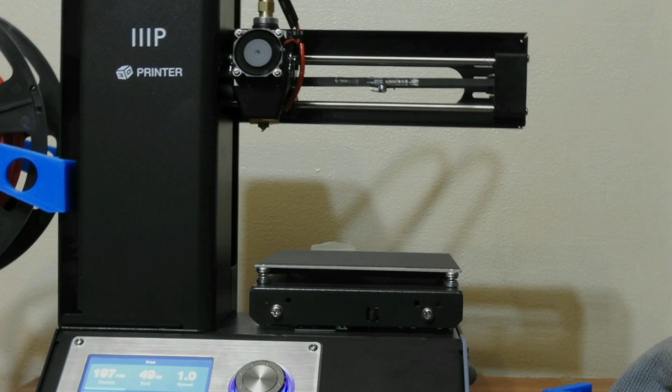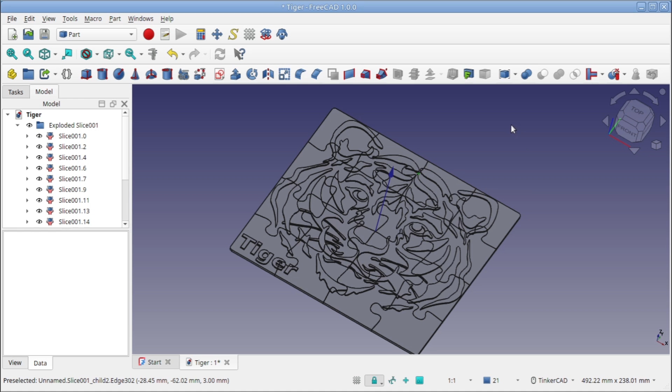So in this video I'm going to give you a tutorial on how you can make 3D puzzles, jigsaw puzzles, using FreeCAD with a little bit of help from Inkscape. What these are is, you can see here, I'll just make a few of these slices invisible. You can see that we actually have a three-dimensional puzzle.

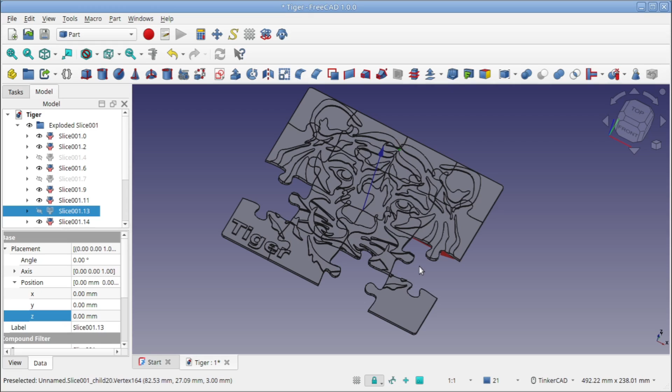This can be printed in place and then put together by your kids or your nieces, nephews, friends. It can be as complicated as you want to make it or as simple as you want to make it. And it's not too hard to do. So that's what we're going to do today. Let's get started. To start with, I'm going to look for a graphic to use on my puzzle.

And in our example, we had a nice tiger. So I'm here on Freepik, Freepik.com. And I'm going to search for tiger. Now what we're going to want to find is vectors. So you see this little highlight here in the middle of this button, vectors. We'll select that. And that will show us line art of tigers.

This is the one that I used. It's just about right. You want to find something that's not too complex. This would be probably a bit too much here. It would overload the CAD engine perhaps. So I'm going to go with this tiger. It's not too complex and I think it'll work just fine. So I selected this one and I downloaded it.

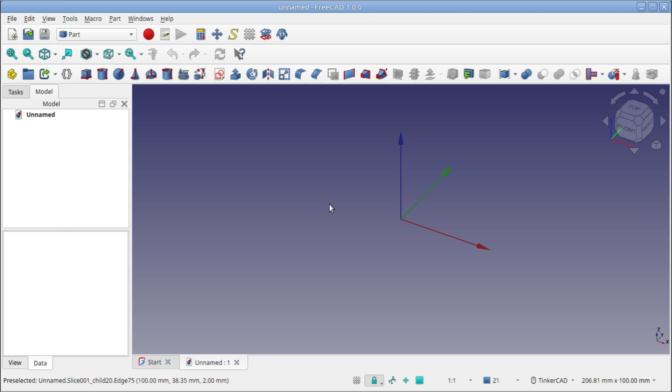Now that I've got my graphic downloaded, before we start working on it, we're going to go to FreeCAD and figure out how big we want our puzzle to be. Okay, I'm in FreeCAD version 1.0 and I'm going to make a new file. We're going to be working in the Part workbench. So I'll create an empty file. The first thing that I'm going to do is make a simple square base for our puzzle. So we're going to go to the sketch, create a sketch on the XY plane.

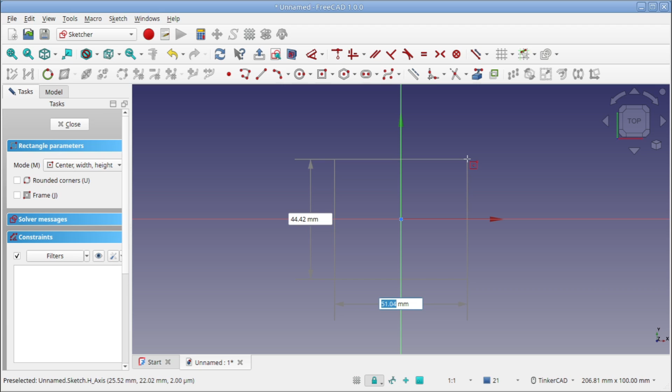And I'm going to just take the simple centered rectangle, draw this out. And I know my print bed can handle up to 250 millimeters, I think. But most print beds on a lot of printers are only 200. So we're going to go 200 millimeters for the size. So I'm going to put in 200, tab, 200, enter. So now we have this nice square platform.

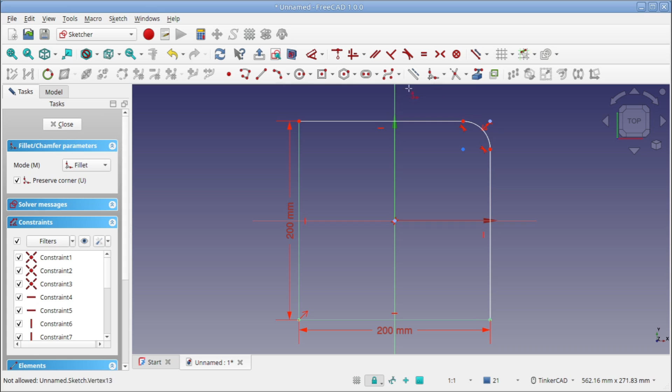Another thing I'm going to do is round these corners off a little bit before we get out of here. So I'll select the Create Fillet tool and I'll click on the point of each of these corners. And that's going to create these fillets and also preserve our dimensions. Then I'll right click to cancel the tool and I'm going to select each of these arcs. Just the line, you just want to make sure you're only selecting the line. And I'm going to make them equal.

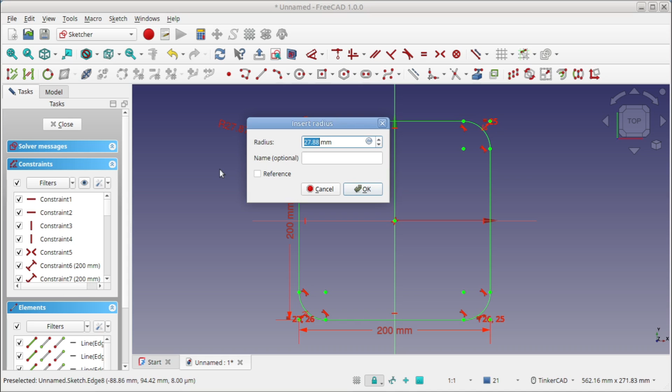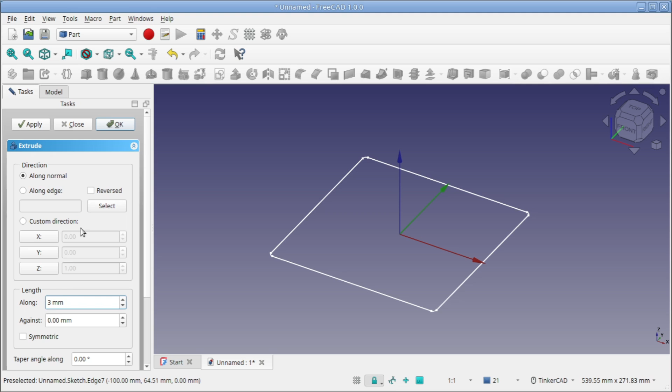And then I'm going to set a radius for one. I'll pick the dimensioning tool, click on this, and we'll set a radius of about 3 or 4 maybe. Let's do 4. That'll just give our puzzle nice rounded corners. And now I'll close the sketch. And then we're going to extrude this just a short distance. This is just the base of our puzzle. I'm probably going to do it about 2 millimeters or maybe 3. Let's do 3. Which I just typed in here, 3, and I'll hit OK. And that's the base of our puzzle.

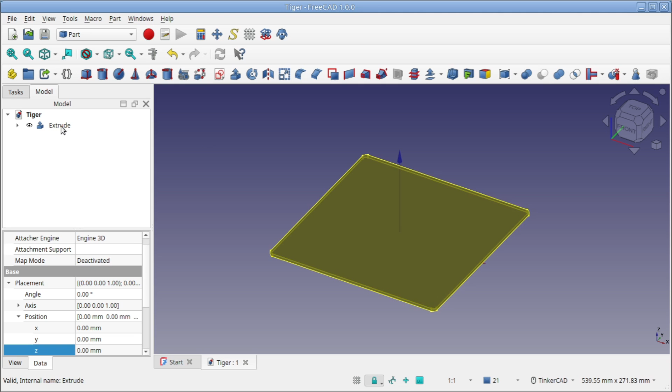Now we know this is 200 millimeters square. So we can use that going forward when we go into Inkscape to work on our graphic. But first, I will save this. I want to call it Tiger. And then, I might rename this. Over here in the model tree, I tend to rename these operations so I can keep track of what's what. So I'm going to right click on that and select rename. And we'll call it base extrude.

Okay, let's go over to Inkscape now and let's pull in that tiger that we downloaded and set it up for FreeCAD. Okay, I'm in Inkscape. This is version 1.4, the current version. I've done a new document and I'm going to come up here to File and select Import. And I'm going to choose that tiger that I downloaded. Here he is,

tiger1.eps, encapsulated PostScript. Sometimes these will download as Adobe Illustrator files and they'll be named .ai. If that's the case, you want to rename it with a .pdf. That makes it easier to import into Inkscape. But we've got an encapsulated PostScript file, and that is fine. So I'll select that, and I'll hit Open. We'll select the defaults.

Okay. And there is our tiger. Now, sometimes these graphics that you import will need a little bit of work. Sometimes they'll be fine. I'm going to drag this tiger down a little, and that's what I wanted to see. You see this white border down here? This has a white rectangle behind it we need to delete. We just want the geometry of the tiger itself.

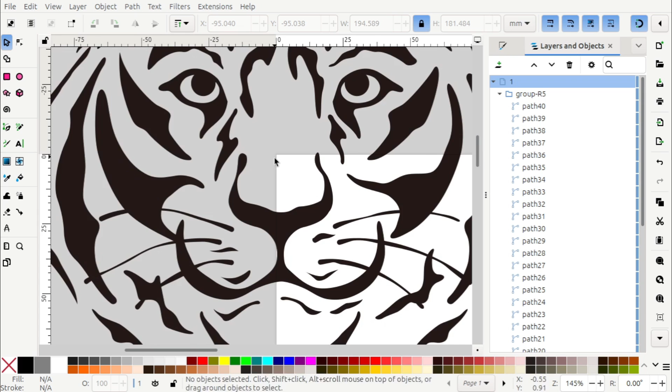Okay, so I'm going to go File, and I'm going to select Save As. And I'm going to call him tiger1.svg. Yep, I've already done this, obviously. Okay, we've got our graphic processed. Let's go over to FreeCAD and set up our puzzle.

Okay, we're back in FreeCAD. I'm going to import our tiger. So I'll go up to File, Import, Tiger 1, open. We want SVG as geometry. We don't want a picture, we want the actual geometry, so I'll select that. Takes it a moment to process, depending upon how complex your graphic is.

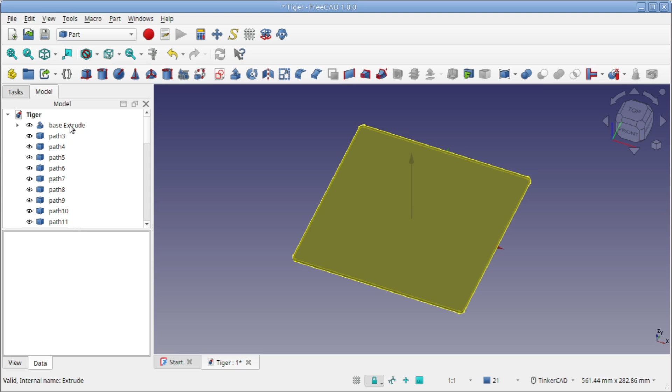Now I'm going to hide my base so I can just see the tiger that we're working on. So I'll click on it over here in the tree, base, extrude. You can see the little eye is there. If I hit the space bar, that hides it. And now we can see our tiger. And yep, look at those eyes. See that? So before we can extrude this, we're going to have to find the paths that are those fillers in the eyes.

They're probably going to be a high number or a low number. I don't think I can click on them. Maybe. Oh yeah, there it is. That's Path 20, okay. This one? Path 19. So path 19 and path 20 are the solid, or the openings in the eyes.

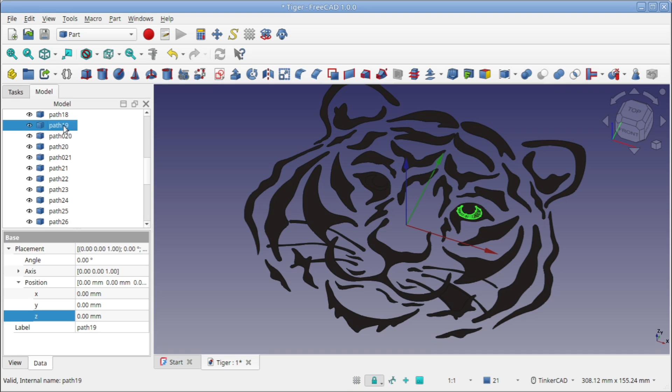I'm going to compound those separately. So I'm going to select both of those. Hold down Control, pick the other one. So now I've got just those two chunks selected. I'm going to come up here to the Make Compound tool.

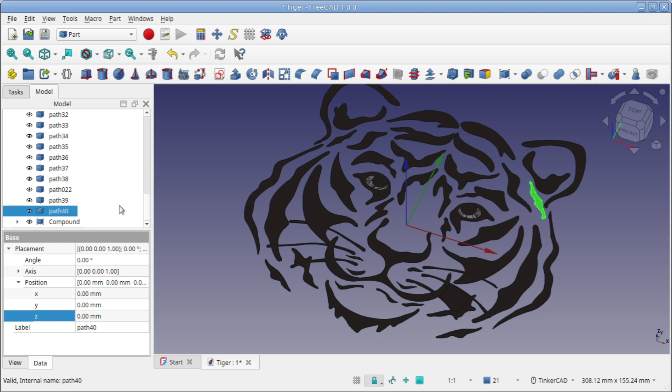Now those two have been combined into a compound. Then I can take the rest of the tiger and combine him into a separate compound. Okay, so now I've just got the tiger, and I'll make him a separate compound. Okay, now what we're going to do is we're going to extrude both of these into 3D space. If we look at it now, it's just an infinitely small or flat outline. We need it to be three-dimensional.

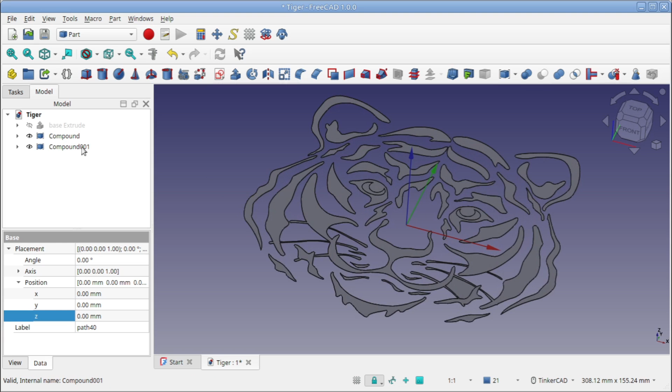So I'm going to start with the tiger itself, and I'm going to extrude him. Now, our base was 3 millimeters, right? So we want him to be a little bit taller than that. So I'm going to extrude him 5 millimeters. So I'll pick the compound of the tiger, come up here to the extrude tool,

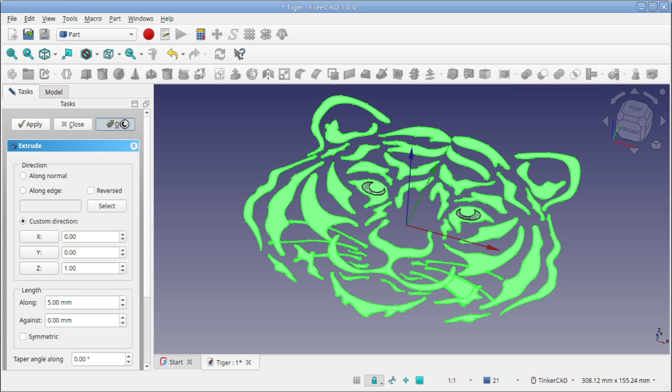and often with imported geometry, it doesn't know what direction is normal to it, so we need to pick a custom direction. We want to extrude it on the Z axis so it gets taller. So I'll pick custom direction. Z already has a 1 in it. That means that we're going to extrude on the Z axis. And I'll set my length here to 5 millimeters. And there is our extruded tiger.

Now you'll notice those eyes again. Well, we need to extrude those cutouts, which is this compound here. So I'll select it, and we'll extrude it the same distance. Pick extrude, custom direction, 5 millimeters. There, now you can see them there. Now we're just going to cut those out of our tiger. And we'll do that with a Boolean cut.

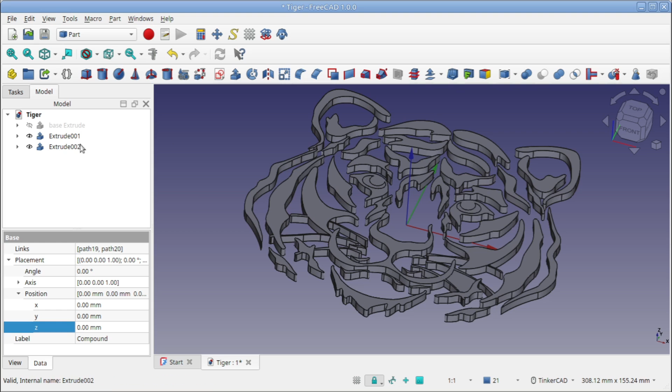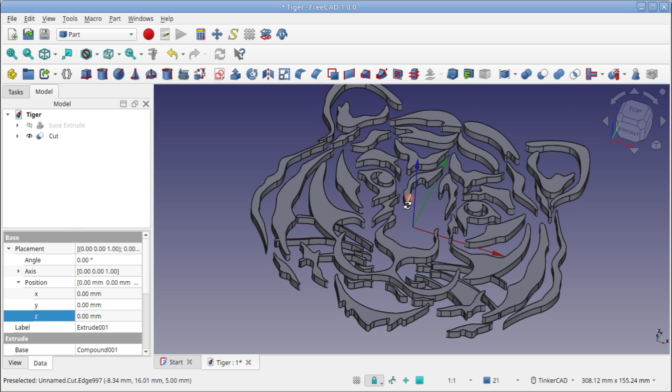So I'll pick the tiger, you click the one you want to keep, and then I'll hold down Control and I'll click the second extrude, the openings in the eyes. So they're both selected. And then we'll come over here to the Boolean cut. There we go. Now we have our tiger with his eyes like they should be. And if I bring back the base, I'll click on it in the tree and reveal it with the space bar. Now you can see we have the basics of our puzzle here.

I'm going to add some text to it as well before we do the jigsaw operation. Just go to a top view. I'm going to put the word tiger here. Let's say we were making this puzzle for our toddler or young child. To do that, I'm going to use the shape string in the draft workbench. So I'll come up here and I'll pick the draft workbench.

And the yellow tools is what you're going to want to look for, not this one, not the text. We want the shape string. So look for the yellow S, shapes from text. You can also find that under the drafting menu, shape from text. That brings up the shape string dialog over here. We can click where we want it. Now if I click on this surface, it's going to raise it up too, so it'll be 3 millimeters off Z on that surface, which is what we want. So I'm going to click right there. You can see that put coordinates in.

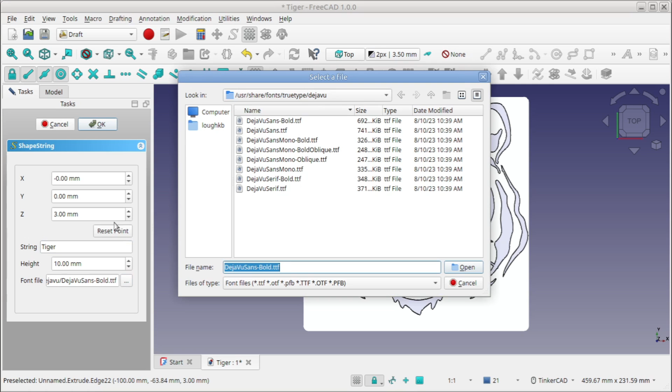The string is our text, so I'll make that tiger. Height is the height of the letters. Not the extrusion, but the vertical height of the letters. We'll leave it at 10. Font file will probably be blank unless you've already set this in preferences, and you'll have to pick a font. So you click this little three-dot browse window, and you can go and browse to your fonts.

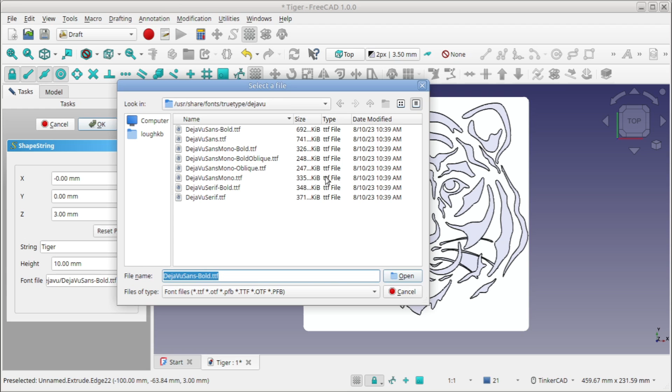Now I'm on Linux, so in Linux the fonts are in /usr/share/fonts. And there's a TrueType directory, and I've picked DejaVu Bold. In Windows, I think it's in System32/fonts. In Mac, it's probably in your System folder. There's a fonts folder, I believe, and you'll find your TrueType fonts in there. So choose your font and hit open. Now that we've got our font, we've got our string, I'll hit OK.

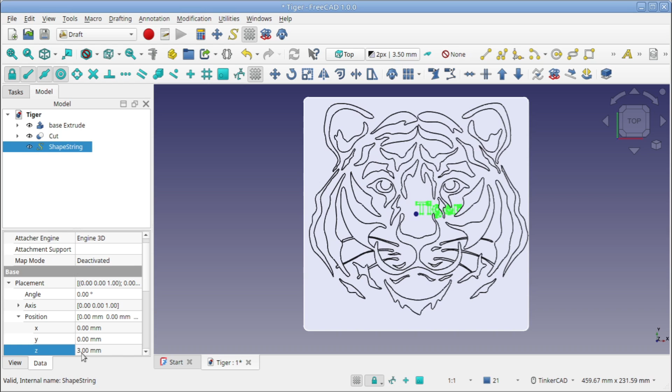Oh, it reset my point. We'll have to move it. That's okay. I can move it right here. Shape string is highlighted. I can go down here under placement, position, and I can move. You can see Z is already at 3. It did move it up to the surface of our base. I'll just have to move it with these numbers here with the Y and X to put it where I want it.

And I'm just using the mouse wheel to change these. And I think I want the text to be a little bit bigger. So I'm going to come down here in the data and find height or size. We'll try 15.

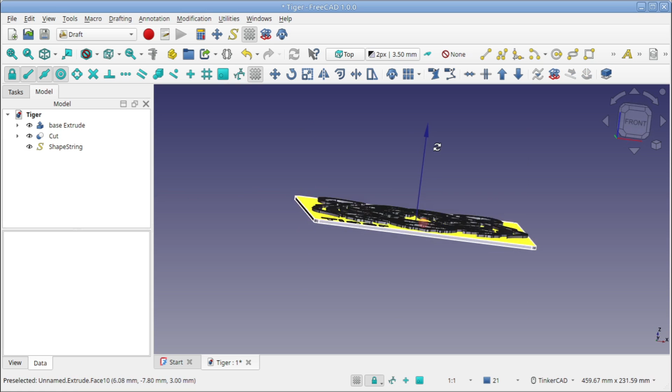I think that looks good. Okay, we'll go with that. So now that we've got our shape string there, we have to extrude it again. See, it's just a little outline. So I'll click on the shape string. We'll go back to the part workbench. Oh, you know what? I think the grid is on. Yeah, let me turn off the grid. Okay, back to the part workbench.

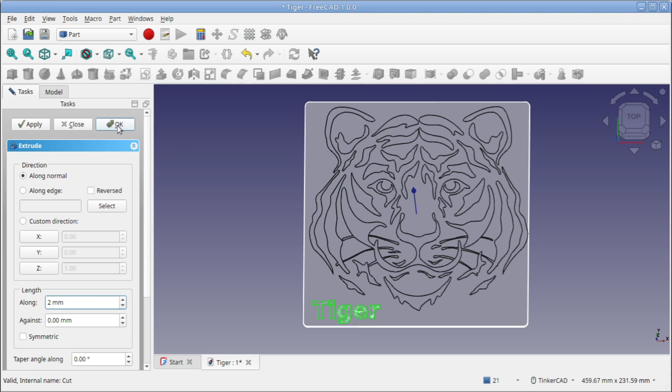Now with our shape string selected, I will extrude it. Now it's already on the surface, so we only need to go another 2 millimeters. So I'll make that 2, and it should be the same length as the rest of the tiger. Hit OK. Yeah. See that? Okay. Now we've got the basics of our puzzle.

We need to do the jigsaw. And to do that, we're going to use a free jigsaw generator on the web. So open your browser, and let's go there to get our jigsaw. This is a free jigsaw generator.

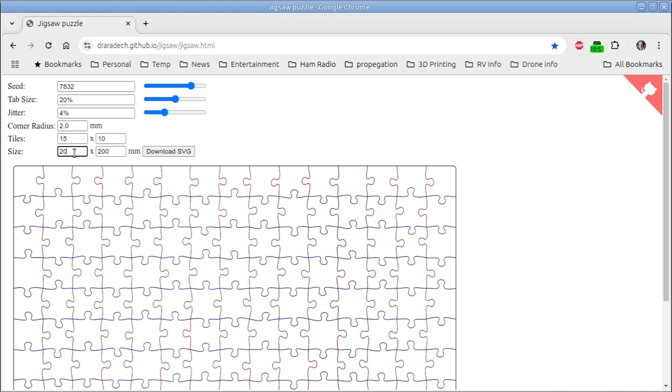It's pretty straightforward. We set our size, and I'm going to make it a little bit bigger than my puzzle because I don't need this outline. We just need the cutouts. So I'm going to make this 205 by 205. And then tiles is how dense you want it to be. I'm going to just make this one simple since we're making it for a kid, 4 by 4. That gives us 16 puzzle pieces.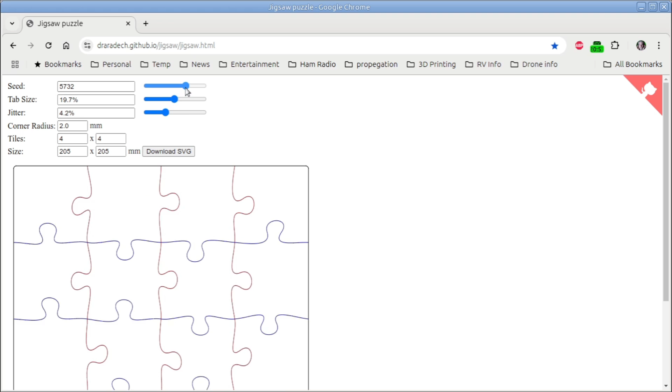Jitter is how complicated. See how it's sort of offset everything? It's not quite as squared off. Tab size is how big the tabs are. You can make them bigger. Seed is just a random number generator. It just randomizes the actual cutouts. But I think that looks pretty good. Maybe let's make those tabs just a little bit bigger. Make it easier for small fingers, right?

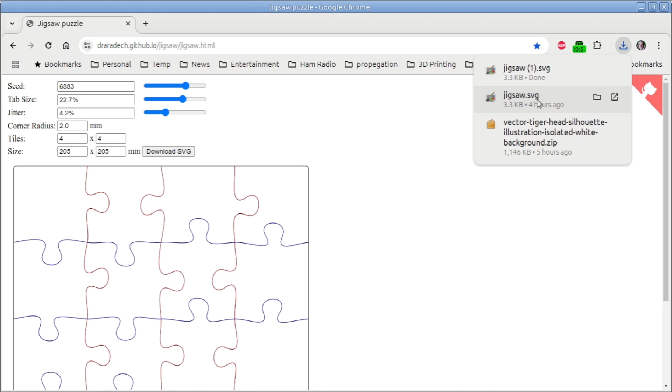So now that we've got our jigsaw, we're going to download the SVG for our jigsaw. And that will go into your downloads, named Jigsaw SVG. And that's it. We're ready to work on the jigsaw. We're going to go back to Inkscape so we can remove this border, and we're going to make these lines a certain thickness for our cutout. So let's go back to Inkscape and load in this jigsaw file that we just downloaded.

Okay, I'm back in Inkscape. I'm going to open our jigsaw that we downloaded. And there it is. Again, we have this outline. This is the big square. You can see when I'm clicking these. Okay, that is the 3 vertical lines. That is the 3 horizontal cutout lines. This one highlights the whole outside. That's the outline. We don't need that. So I'm going to delete that.

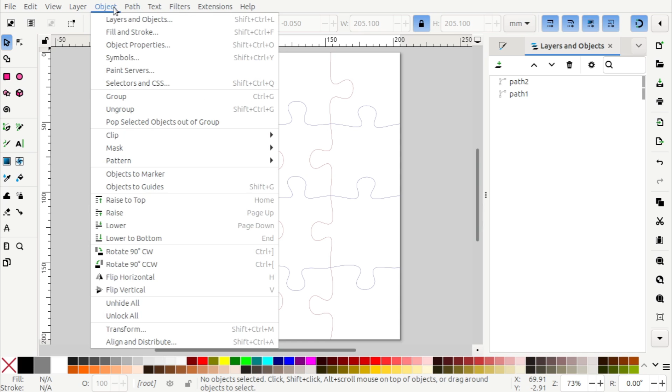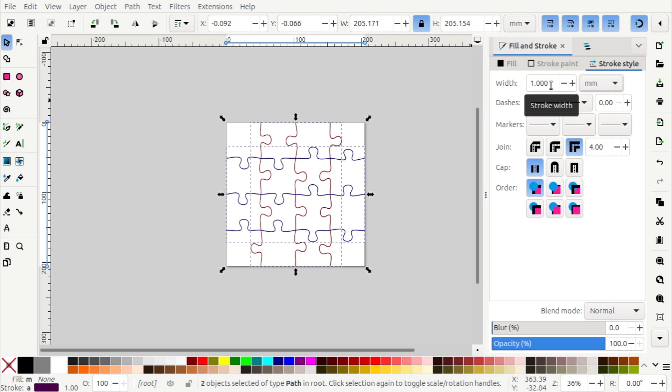Now, we're going to give these a thickness, and we're going to do that with the strokes menu. So I'm going to come up here to Object, Fill and Stroke. That brings up our Fill and Stroke tab over here. And then I'm going to select, well, we'll zoom out a little bit, and we'll draw a box so we're selecting both the vertical and horizontal lines. And our stroke style is our stroke width. This is how wide those lines are. If I change that to 1, now they're 1 millimeter, which is too big.

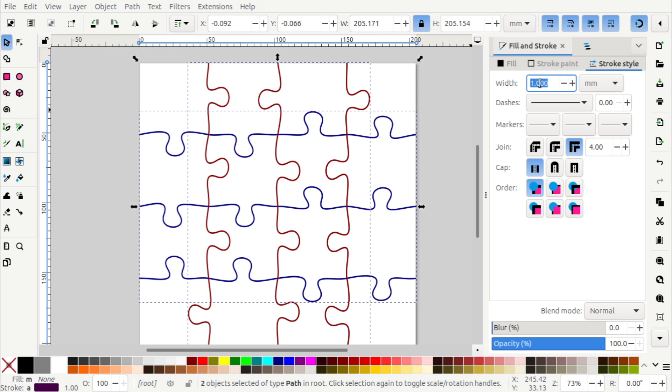Most printers will be able to print in place if this is at least 0.2 millimeters. If you go much smaller than that, you run the risk of the edges fusing with each other. You might need to go bigger. It depends on your printer. So I'm going to set this to 0.2 because I know that my printer can handle that just fine. And now these lines are 0.2 millimeters.

Before we can import them into the CAD program, we need to do one more thing. This is important. We need to convert this stroke to a path. Right now, it's just infinitesimally narrow, and FreeCAD wouldn't see it as having any width. But if we convert this stroke to path, now these will be 2 separate lines that are 0.2 millimeters apart. So it'll have a little thickness.

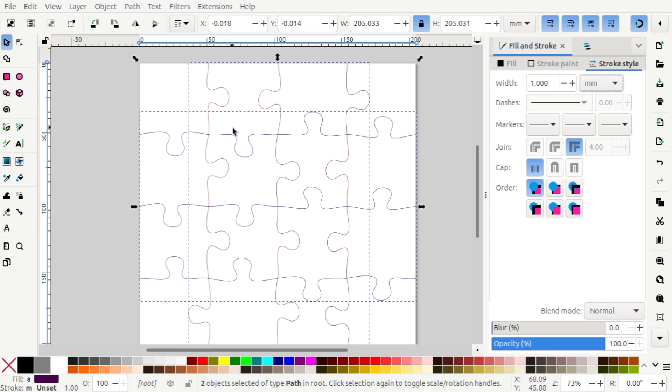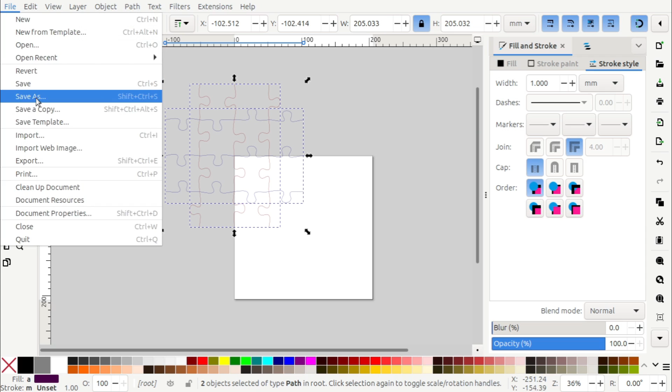And again, I need to center it. So I've got the whole thing selected. I'm going to make sure my snapping is on. It's just over 200 millimeters in both directions, you can see. So we're going to drag this up. Right there. See the blue lines up here just outside of the 100 on each side? It's perfectly centered. Okay, now we will save this. Save as. And I'm going to call it Jigsaw Processed to keep it differentiated from the one we downloaded.

All right, we're done in Inkscape. The rest we can do in FreeCAD. Okay, we're back in FreeCAD. I'm going to do something here before I start with the puzzle, or with the cuts. We need to combine these elements we have. We have our base, we have the tiger, and we have the words.

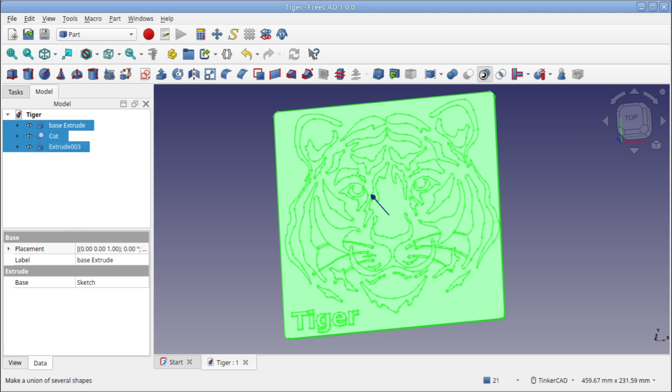So I'm going to come up here, base extrude, and the cut, which is our tiger, and the extrude, and I'm going to come up here to the Boolean and select union. If this doesn't work, which sometimes it won't because of the complexity of the geometry, you can compound them and just use it as a compound.

Okay, now we've got our uncut puzzle all combined together as this fusion. I will rename this Puzzle Fusion. If I wanted to make any further changes, I could still edit this. For example, I've just noticed my tiger is not centered. He's wide over there and he's right up against the edge there. I might want to move him over just a little bit.

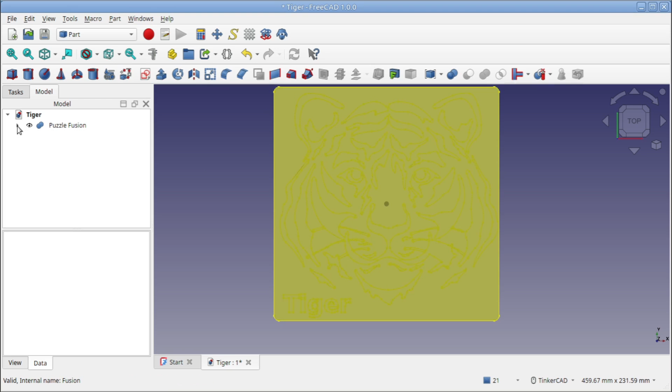So I can come over here to the tree where our puzzle fusion is, hit this little triangle, and let's see. Cut was where our tiger was. Yes. So with the cut highlighted, I can go to Placement, Position, and I want to move him just a little bit to the left on the X. Maybe minus 2 millimeters. Let's see how that looks.

Now, unfortunately, I have to wait for it to recompute. It's got to go through and redo all those operations, but in a moment, we'll see the tiger update. There we go. He shifted, and he's just right. Now, look at that. See, not that far from each edge. So you can always re-edit things. It's the beauty of a parametric program.

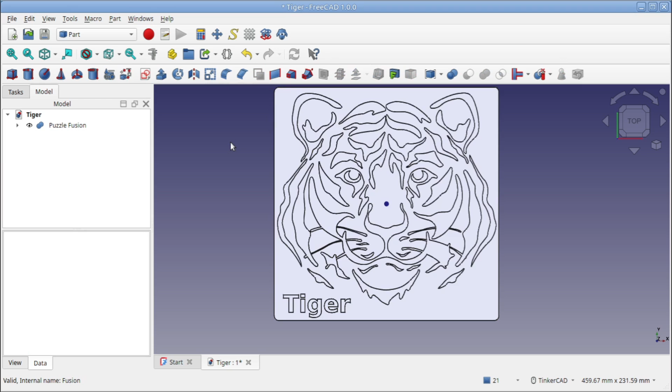Okay, we've got our puzzle fusion. We need to bring in our jigsaw cut. So I'm going to go to File, Import, and we called it Jigsaw Processed. So there it is. I'll select that and hit Open. Again, I want to use SVG as geometry. And it's there. We can't see it because it's hiding under our fusion. Let's hide our fusion. I'll click it in the model tree and hit the space bar. And there it is.

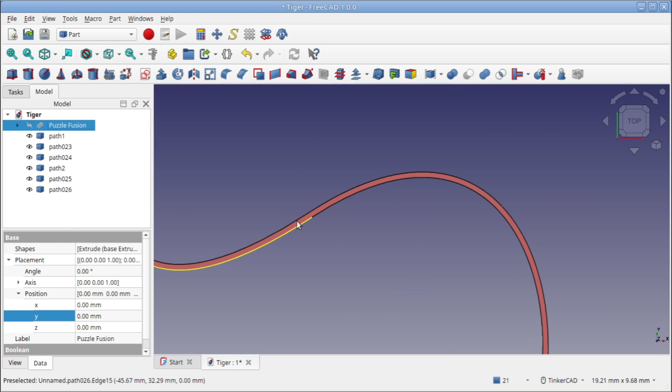1, 2, 3 horizontal paths and 1, 2, 3 vertical paths. Now, remember when I said the stroke? Look here. By converting stroke to path, we created 2 paths that make an outline of the stroke that is 0.2 millimeters thick. That's why we did that in Inkscape instead of just bringing this into FreeCAD. This will let us print it in place and let the pieces fit together.

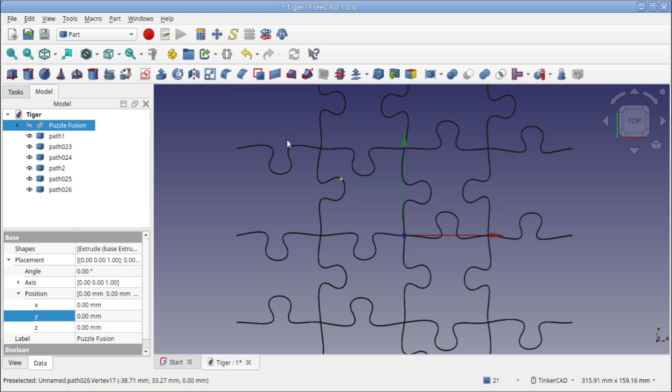What we need to do, though, we can't just cut these all out of our puzzle at once. These places where the geometry intersects here will confuse the CAD engine. We have to do the vertical lines and the horizontal lines separately. So I'm going to compound them together again. I'm going to select just the 3 horizontal paths, make a compound, and then I'm going to select just the 3 vertical paths and make a compound.

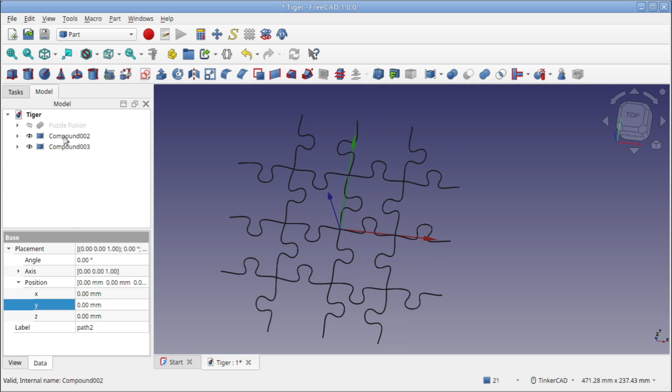Okay, to cut things out, we're going to need to extrude these to where they come up all the way through our model. So I'm going to extrude each of these individually. Actually, I think I can do them both together, since we're using the same value. I'll hit the extrude. Again, custom direction Z, so it knows which way to go. And we'll do 8 millimeters. It just has to be taller than our model.

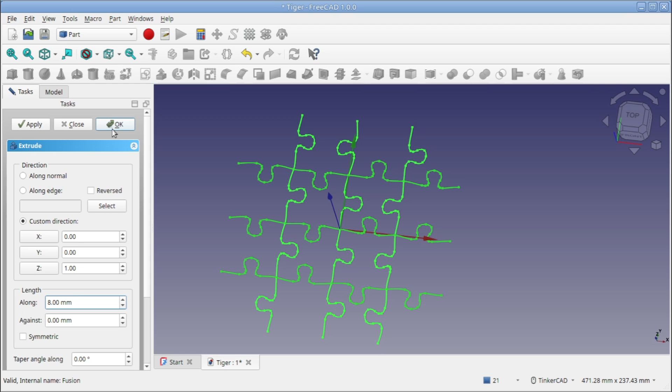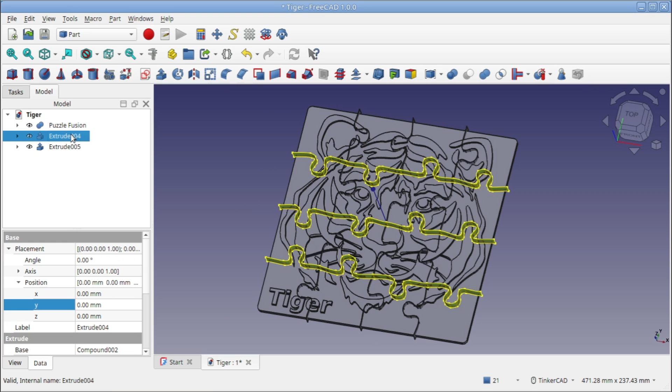There we go. Now we've got these walls. If I bring the puzzle back, make it visible, you can see that they come all the way up through our puzzle. And we are ready to slice our puzzle up. We're going to do it one at a time. We're just going to do the horizontal ones first. So I'm going to select the puzzle, hold down Control and select the extrude.

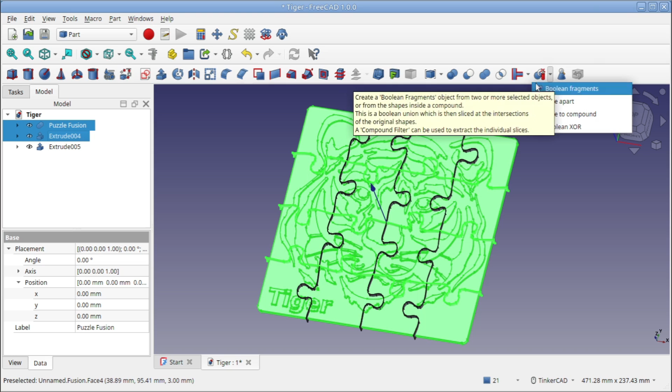I'm not going to do a Boolean cut because that sometimes fails when the geometry gets really complex. What I am going to do is slice apart, which is under this Boolean fragments icon, or you can go to the Part menu, Split, Slice apart. It'll take it a little while to process. Over here on the tree now, you see this exploded slice. If I expand that, these are all the slices that it got cut into.

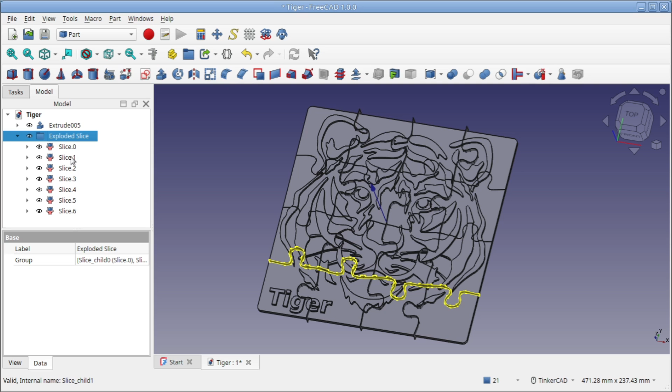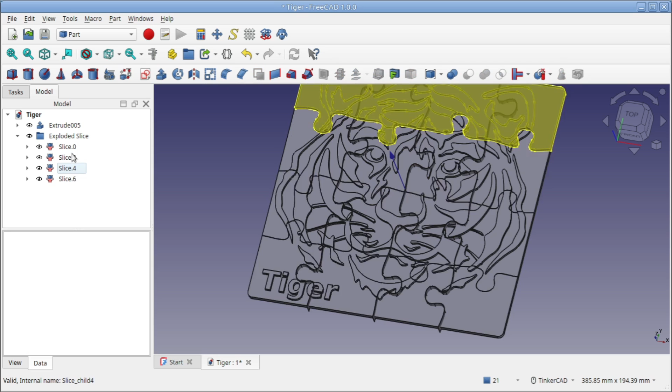But we need to delete these. This is our puzzle pieces. This is the part that we use to slice with. That's still there. So we're going to delete that out of the tree. With it highlighted, I'll hit the delete key. There's our next puzzle piece. That's the cut tool, so we'll delete that. There's our next puzzle piece, and that's the cut tool, so we'll delete that. That leaves us with our 4 puzzle slices.

Now we're going to cut those with the vertical lines. So we're going to do the same thing. We're just going to select this exploded slice, hold down the Control key and select our cutting tool, and we're going to do slice apart again. And again, it will take a little while to process.

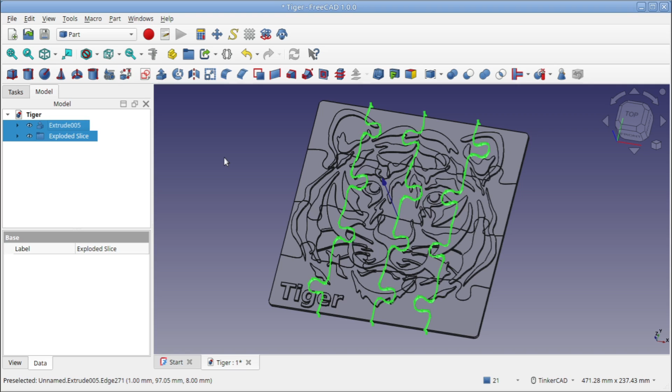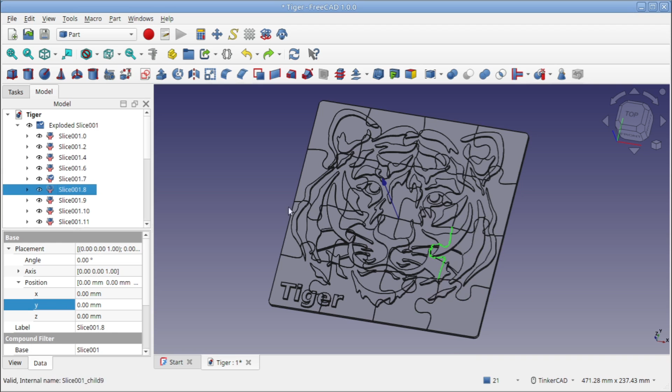And it's done. Well, almost. We're going to have to clean up a few things in here again, too. That's a puzzle piece, a fragment of the slice line you can see there. So I'll delete that. Puzzle piece, slice line, delete that. If you accidentally delete a piece you didn't want to, you can hit Control Z or Command Z on a Mac to undo that operation. So I'm just looking for these slice pieces, the cutting tool pieces, and deleting those.

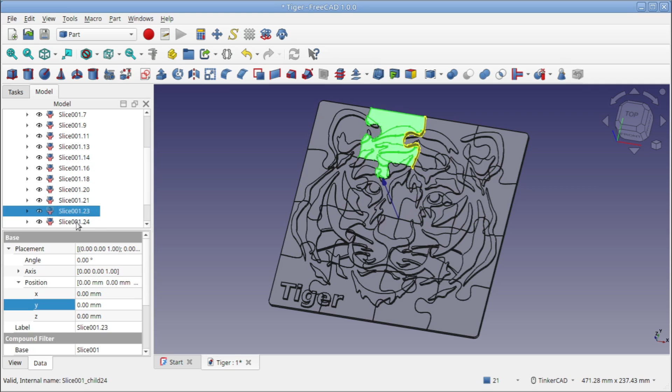That's it. And there we go. We now have our puzzle all ready to be exported for 3D printing. And it's got these nice little cuts in it that are 0.2 millimeters.

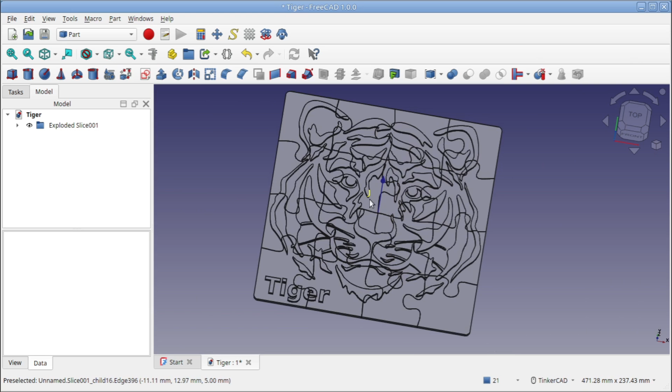Now, to do this in multicolor, we're going to do a color change in the slicer. And all printers can do simple color changes layer to layer, well, most all modern printers can for sure. And I'm going to show you how to do that.

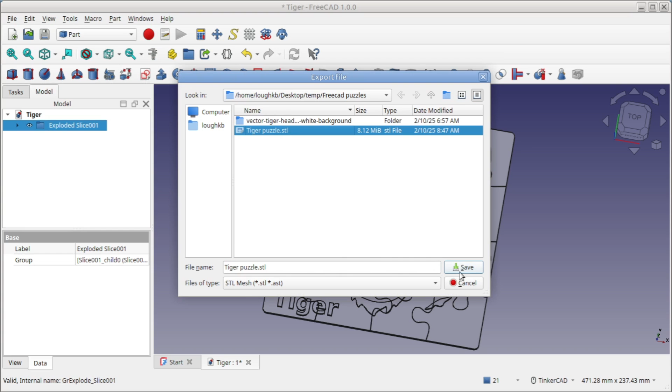So let's export our puzzle. I just click on this exploded slice now and go to File, Export, Tiger Puzzle. I'm exporting it as an STL mesh for 3D printing. And we are done. Let's go over to the slicer and I'll show you how to set up the multicolor print. Okay, I'm in PrusaSlicer.

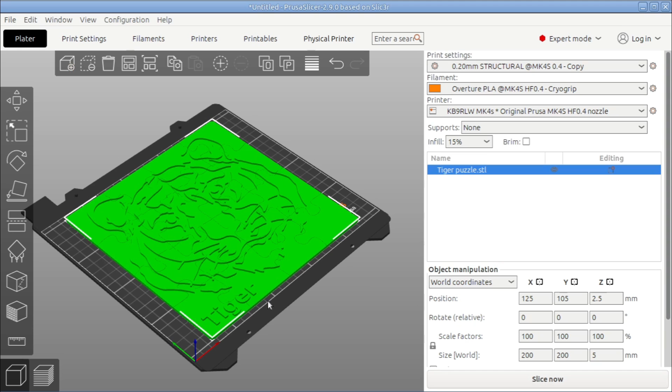Most slicers should work in a similar fashion. I'm just going to give you the concepts. So I'm going to import our model, tigerpuzzle.stl. There he is. And again, you can see we got these nice little gaps in here.

Okay, we're going to set up our normal print settings and hit slice. So it will create an initial slicing of the file, and then we're going to go through the layers and choose where we want to do a color change.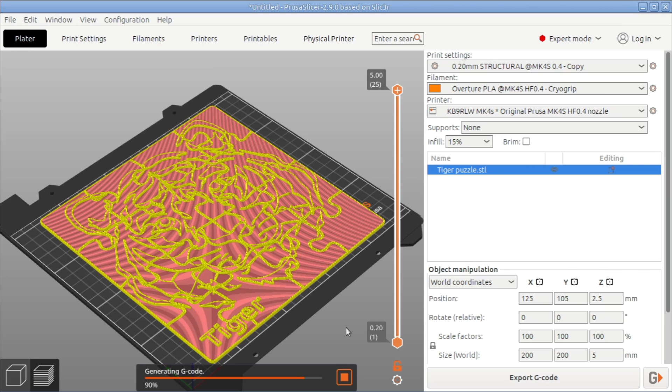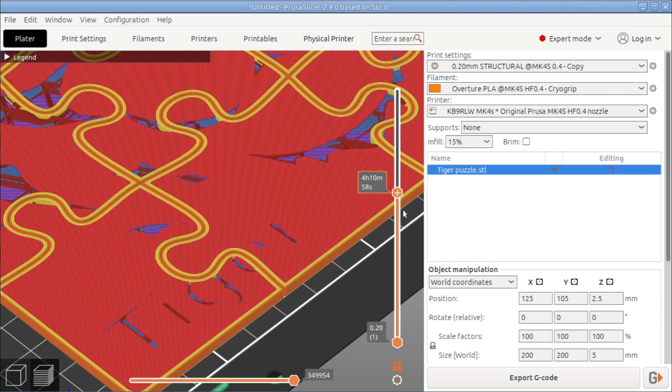Okay, slicing is finished. I'm going to zoom in a little here. Now you'll remember that the base of our puzzle was 3 millimeters. So I look at the slider here and the top shows the top layer is 5 millimeters, 25 layers. I'm going to bring this down. So there is 3 millimeters. If I look at the next layer, 3.2, you can see it's starting to do the letters and the tiger. So that's where we want to do the color change, right there at 3.2 millimeters.

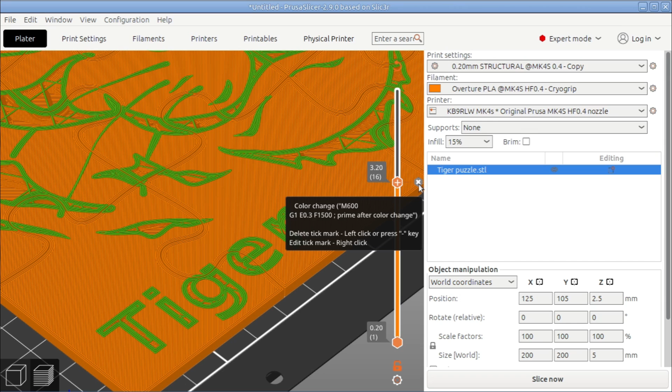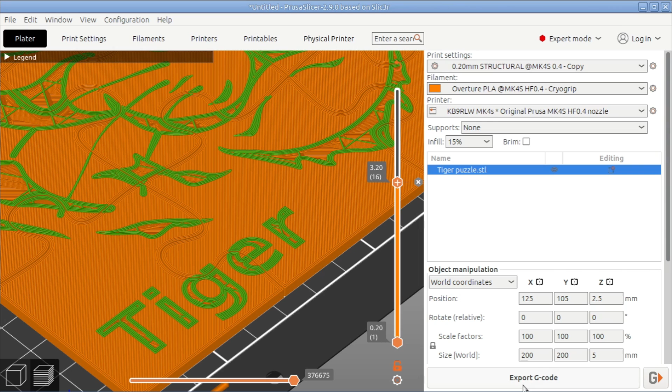I'll click plus to add a color change. And that inserts a command into the G-code that will cause the printer to pause, unload the filament, allow us to load the new filament, and then resume the print. Now I have to hit slice now again to update the G-code with that color change. And it's done. We are ready to send the file to the printer for printing.

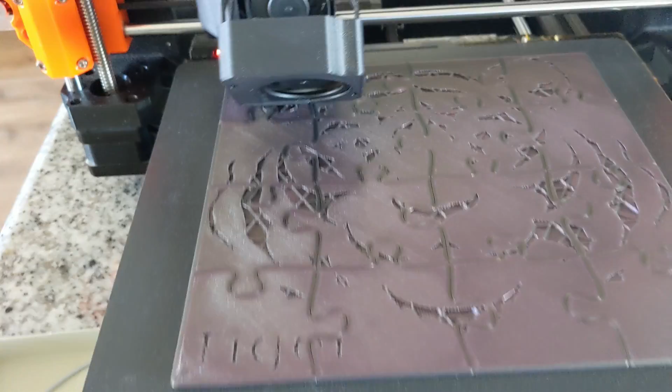Our print-in-place puzzle. Okay, well, it's printing away, and it's almost to the color change. So I thought I would go ahead and film what happens. I've got my next roll of filament up here ready to go. It's just finishing the last puzzle piece on this layer, and then it's going to pause and ask us to load new filament.

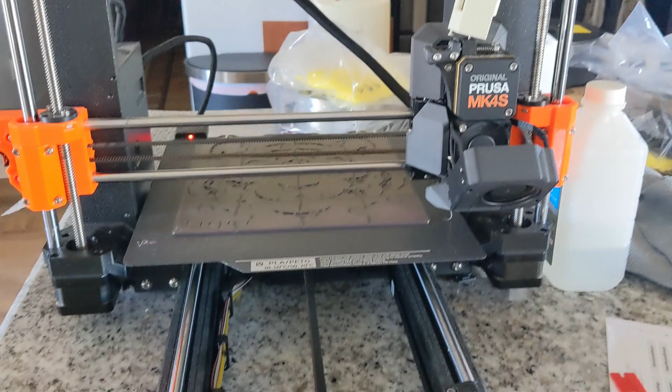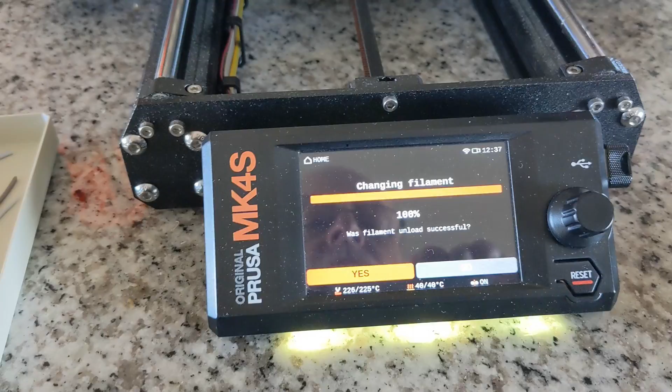Here we go. You can see it moves the carriage off to the side. It's just unloading the current filament. There it goes. It's asking me if the filament unload was successful. I'll say yes. Now it wants me to load the next filament.

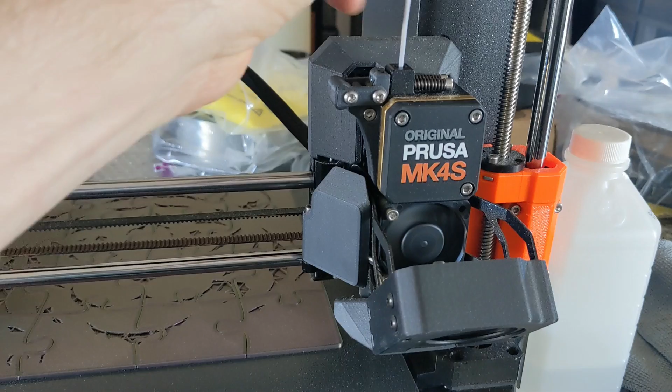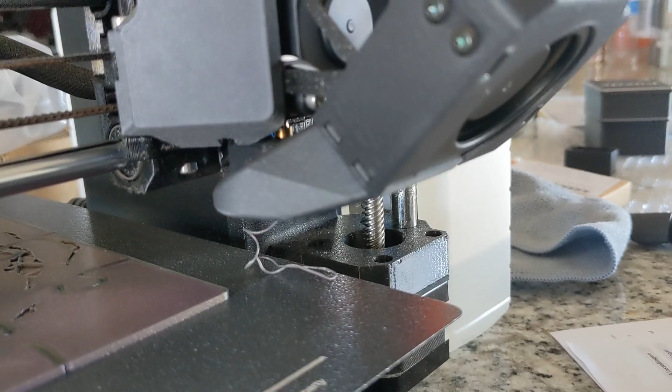There it goes, it's taking it in. Now what it's going to do is it's going to do a purge where it's going to pump that filament through to make sure that we get the new color. There it just changed to the silver.

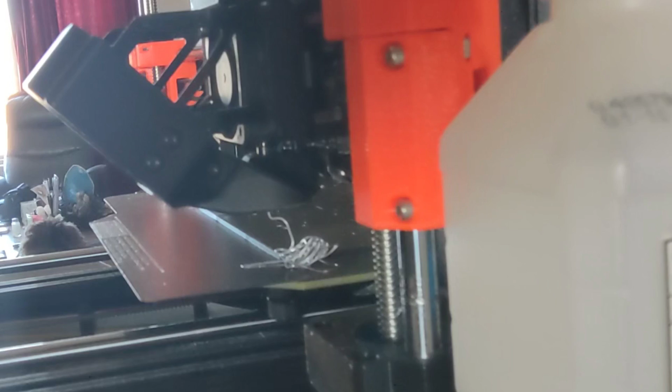Now unfortunately I can't get my camera low enough to where you can see the nozzle. I'm going to pluck off the filament that it purged. Now, as soon as I tell it that yes, the filament is ready, it's going to prime the nozzle and spit out another little bit of filament, and then it's going to move over and start printing. So I'm going to get the tweezers ready to grab that little extra bit of filament that it spits out just before it starts moving, and then I'm going to hit OK.

There, caught it. See? That was what it spit out. And now it will just continue on printing with the new filament, the new color, and we'll get our silver for the tiger.

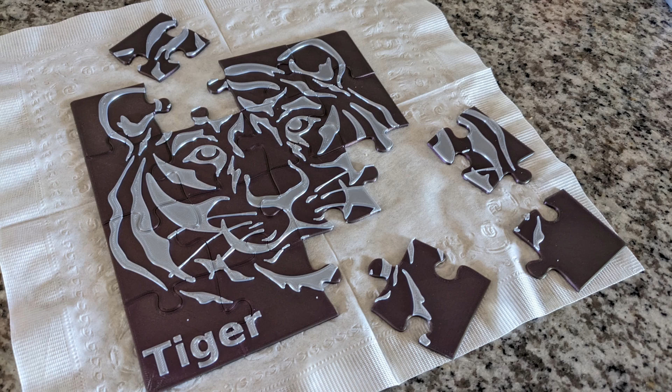And here is the result. Our 3D printed puzzle, all ready for our nieces, nephews, grandkids, or sons and daughters to play with. I hope you found that fun and interesting, and I hope you make lots of really cool puzzles for your friends and kids.